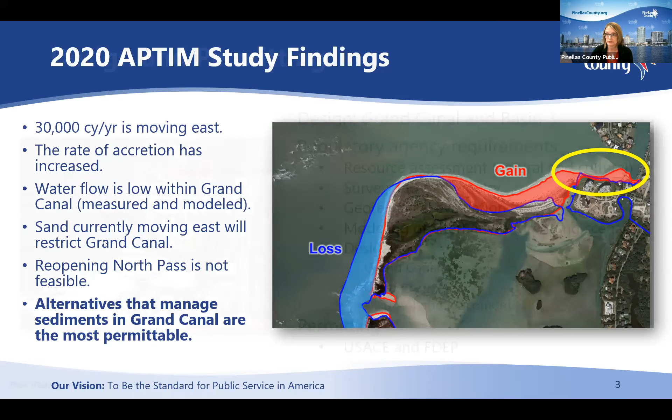So we have been working very hard to design this project. I know there's been a lot of concern about how long it takes. There is a lot of work that goes into collecting both environmental data, cultural data, survey and bathymetry data that help us understand the volume of material that would need to be removed, geotechnical information that helps us understand the quality of the material that's to be removed, and that way we can better understand how it can be reused or how it needs to be disposed of.

And then there were various alternatives that were modeled so that we could understand which approach gave us the best bang for the buck, if you will, gave us the longest lasting project. And so that design included the Grand Canal within its current alignment out to Pass-a-Grille Channel, as shown in the image, and Basin A, which is basically a sand trap just to the south of the Grand Canal itself, out to about the mean high water line.

So that shape is not fixed in stone. It does have to kind of work with the property boundaries that we have. And then there's disposal and placement to consider.

And right now, that gold star, that is my cue to tell you that's the important part, because that is what would really keep the cost down here, is being able to beneficially reutilize this material as part of the upcoming Pass-a-Grille nourishment. Permitting for this project is required by both the Army Corps of Engineers Regulatory Division as well as DEP. So I just wanted to be clear, we talk a lot about the Army Corps in relation to beach renourishment. This is a different branch of the Army Corps that is focused on regulatory permitting.

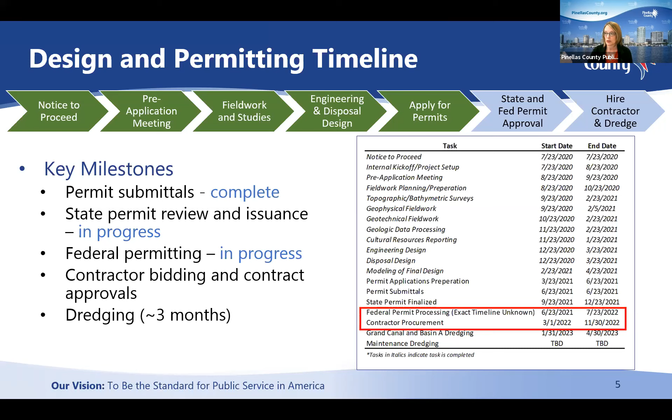So right now, to date, initially the county spent about $200,000 on the feasibility study, and that was the APTIM study that was presented in 2020. Design and permitting is approximately $231,000 for the project, and construction is close to $3 million.

So what we're looking at, and I'm going to define these terms because you're going to hear them again: worst case scenario would be that the regulatory agencies don't support us using the material for beneficial reuse. Now, I've already told you that the state supports this, so that's the good news. I don't believe the worst case is going to happen because we've already received positive feedback there.

The best case scenario is $585,000 for this project, meaning that we can beneficially reutilize that material, and a good chunk of the project cost can be paid for by the county. I've got another gold star here, that 5-year O&M estimate.

This design is estimated to last 5 years, and that is conservative. The accretion rates that were modeled by APTIM back in the 2020 study are a little slower than what the model said it was, so that's good. It may be a little longer than 5, but storms can obviously make this a little bit difficult to say. If nothing were to exacerbate the conditions, then 5 years would be a reasonable estimate. A storm can obviously change that in a day. So that's where we are.

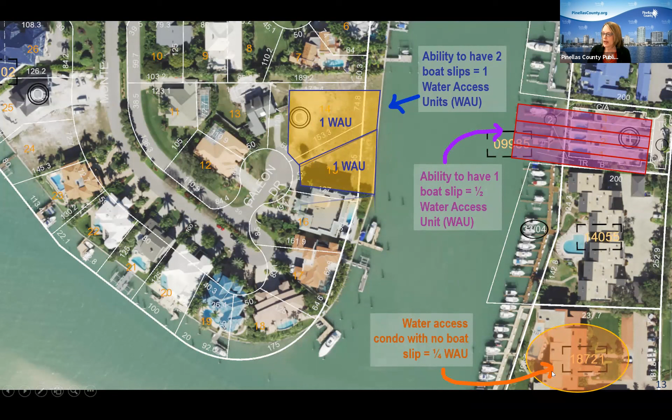And then we have some condos over here. We have 4 condos and 4 boat slips, so they're half an access unit. And then we have some condos here that some have slips, but some don't have any at all. And so if you don't have any at all, you're a quarter of an access unit.

And here is what that looks like. So if you go over to the right-hand side and go under best case estimate, you can see that a single family residential home would pay about $1,200, a condo without a slip about $300, a condo with 1 slip about $600, a condo with 2 slips would be equal to a single family home, and then the marina would be close to

$283,000. And so if you look at the percentage breakdown, that's about 50-50. So the commercial entities would contribute about 50%, and the residential about 50%.

So looking at, again, just the best case scenario, division of costs, when we presented the linear frontage methodology, Pinellas County would be paying 82% of the total project cost. The commercial was only about 2% of the project cost overall, and the residential was about 16%.

When we utilize the water access unit methodology based on boat slips, the county would still be paying 82%, but the residential and the commercial would be contributing equally.

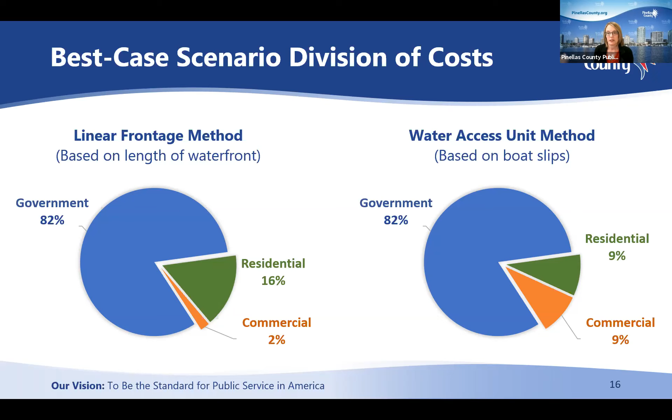Additionally, when we do an assessment, those costs can be split over multiple years. It's really dependent on what the community requests and then what the Board of County Commissioners would approve. Those costs are for the total project, so it's one time, it's not an annual cost. It could be split over, if you just want to pay it out over 1 year and be done, that can be handled, or 2, 4, 5 years, it can be spread out. So depending on what the majority of the community would like to do, that is something that can be looked at as well.

So here comes your first poll question. So got to ask you first.

Before we move on to the poll questions, if you have any specific questions about the methodologies, let's address those first, because I want to make sure that everybody understands the difference between the two. Then we will go on to the poll question and finish up the presentation, and there's more Q&A afterwards. So I would just ask that if you have questions that are not methodology related, hold that for a minute, and let's check and see if we've got some questions very specific to the methodology. I'm going to go into the Q&A right now.

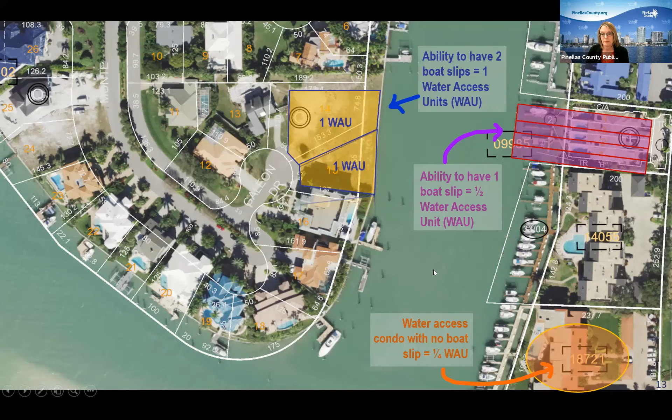This is what that looked like side by side. So I hope that helped.

Let me look at the questions again really quick, just to make sure. Are the condo numbers per condo or per unit? They are per unit.

How is the general public assessed for their use? If they're coming to the marina, they're paying those charges. Don't have anything more on that one.

90% of the traffic is not from Grand Canal residents. Why is the marina only paying half? We had to find a methodology that is sound and can be justified based on the various uses out there. The marina paying 50% of the cost is significant, and there's still a lot of private vessels out there as well. So this was a methodology that got us closer to what was requested of the community, which was to make it more fair based on the marina having a lot more activity than any single family resident.

How many slips were assigned to the marina? I'll have to go back to the table. Sorry folks, really trying to make sure we get you all your answers. All right, so here we are - 232.5 water access units were charged to the condo, to the commercial property. So if you multiply that number by 2, that is how many slips they have, both wet and dry total. Right.

So a condo with 10 units and 10 slips equals 5 water access units. Yes, half per unit, correct.

So I think, how do you define a slip? It's defined by code. A boat slip can accommodate a boat, it can also be tie poles - 4 to 6 tie poles can also construe a slip. So that is defined in our code, it's not arbitrary.

I don't mean marina use, I'm talking about the boaters who utilize the canal. There is no way that we can charge anyone who just might happen to come into the canal.

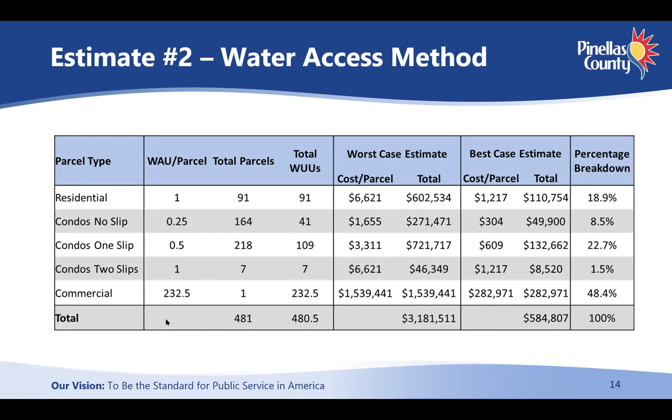The water access unit methodology includes both the marina's wet slips and the dry slips. And because a water access unit is equal to 2 slips, you take that total number and divide it by 2. So that's how you get to that number for the marina in that area. Well, is it going to be one? Okay, but they only get 1 vote, correct? They only get one vote, not 465. Correct. Gotcha. Yeah, okay, thank you. You're welcome.

Al, are you there? Okay, still no Al.

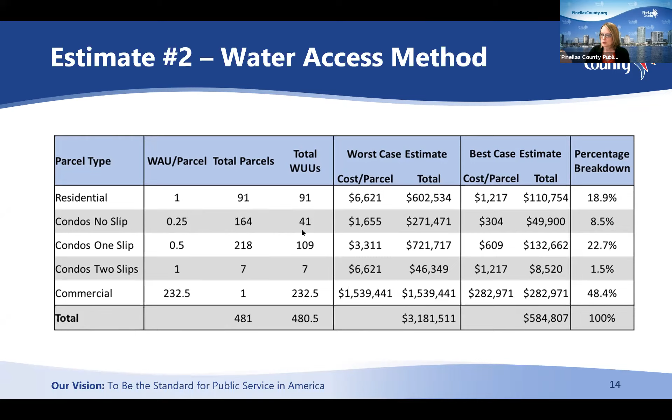All right, so I'm going to move on to the rest of the presentation now. Just going to fast forward us here.

All right, so now for the poll. You've heard a lot of information and a lot of great questions. Based on that, which methodology between the linear frontage foot method or the water access method do you believe is more equitable to the community? You're going to see a poll pop up on your screen. It's anonymous, and the results will be posted as soon as we give folks an opportunity to vote and get the majority of the feedback. Then we'll hit the button and you'll see what it says.

So we're at about 53% participation, doing great. I love it. Starting to slow down, we're at about 68%. I know we can do better than that. Come on, guys. I'd love to see 100%. We're at 69%, anybody else want to vote? Oops, we just hit 70. We're still going. People are still jumping in. All right, it looks like we've kind of settled out at about 80%.

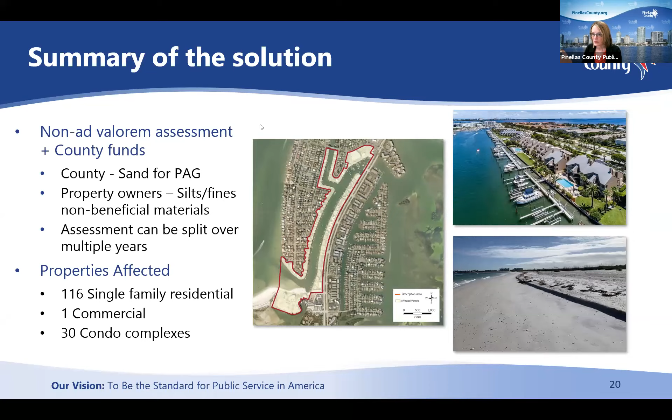Larry shared that the TVCA can email out a link to the presentation to all residents. Thank you, Larry. Can you show the slide again that shows where the sand trap is located? Sure. Oops, that might have been it. It's out of my way. Nope, sorry, keep going. Sorry about that, I've got to get back to the beginning.

Okay, there we go. So the sand trap is called Basin 3, and it will be directly adjacent to Grand Canal. Again, what we're trying to accomplish here is as that sand is moving to the east, it falls into the trap first. Don't focus so much on the exact shape of it or exactly where it's located. It could shift a little bit to the west, a little bit further to the north, it might be more round. It's really dependent on where the mean high water line is and where we can work there. But the point is it's designed to capture a certain volume of sand.

Relative to the Johns Pass question, is the methodology proposed similar? We don't have anything proposed for a methodology for that project right now. Basically they're at where you were a year ago, we just finished the study.

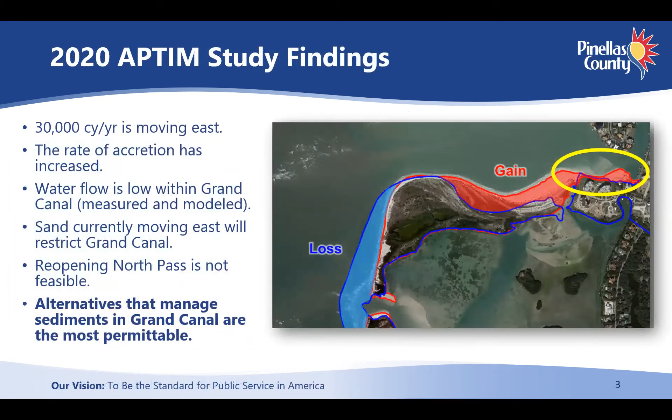I wanted to thank you, the county staff and the commissioners for all the work they put into this, and also our own Tierra Verde Community Association board. Everything was really informative. I did want to ask about something from the last meeting, a couple months ago, one of the public meetings, that I didn't quite understand. It deals with the accreted sand, the mean high water line, and the ability for Colony Key to acquire additional beach property. It sounded like they could continue acquiring beach property from where the buildings are located all the way up to the Gulf of Mexico. I wasn't sure if I understood that correctly.

Okay, let me find a good image, I'll just stick with this one. So through accretion, as sand builds up in this area, can you see my cursor? Yeah, I can see. Okay, so this area is owned, for lack of a better word at this moment, by the upland riparian owners.

They don't need to do anything else. There was a homeowner, I think the first house on Colony Drive, that did file quiet title, but you don't have to do that. Just by accretion law within the state of Florida, as sand builds up over time, the sand above the mean high water line is owned by the upland riparian owner. Now to the west of Colony Key, their property boundary stops just waterward of where their structures are. Beyond that is not their property, it's county - actually Shell Key Preserve and state land, within the preserve. So they could not claim Shell Key.

Okay, that's what it seemed like you were saying last time, because I understood there's like, it's not a canal, but there's a waterway in front of Colony Key that has some rocks and things. I typically, because you're allowed to, go through there to the other side of the key to wade fish. It sounded like you were telling me I couldn't do that any longer.

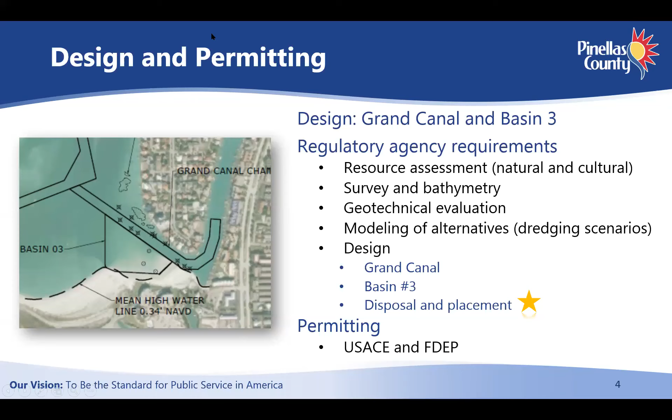We appreciate the open line of communication. Brian is always there, you're always there whenever we bring up any issues regarding the island. So we appreciate it. We're glad that we've come off of that initial assessment process. This seems to be much more fair and equitable.

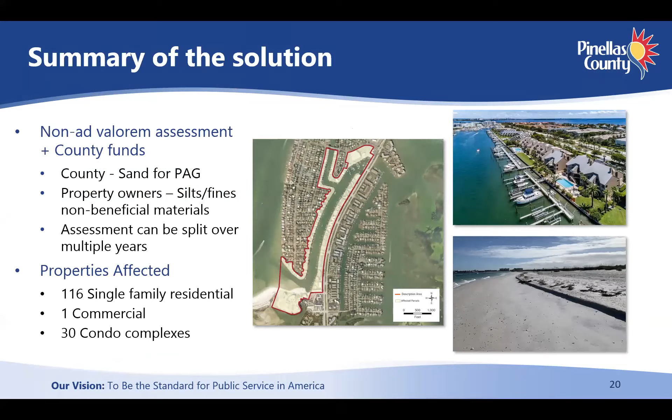But good job, and we'll keep communicating with you and Brian, and look forward to one day having this thing opened up. And then, with that new sand assessment and acquisition every three, four, five years, hopefully we'll never have to come across having to pay for the cost of this maintenance ever in the future, not at least in our lifetime. So thank you very much.

Thank you, Larry, and thank you to everybody for being here tonight. More to come, but I'm glad we were able to spend this time together and answer a lot of questions, and we'll talk to you again soon.